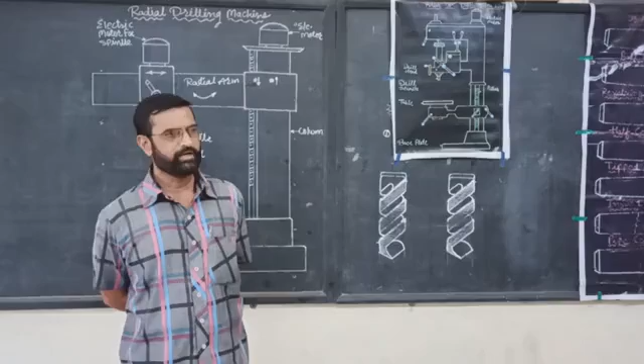In the previous video, we observed what is safety. Safety means work with confidence and with a cool mind. To avoid accidents is known as safety. There are two kinds of safety things, safety precautions we can call.

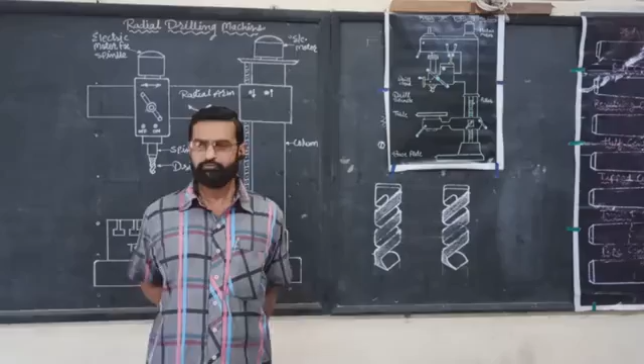Safety precautions for an individual means a person working in the workshop has to follow a few rules, such as do not wear loose clothes. If you wear loose clothes, those may get stuck in the bench vice, in a machine or in some handle, and it may cause an accident. Similarly, we have so many sliding and rotating parts in our workshop. So loose clothes may get trapped in those parts, which may cause an accident. To avoid that, one should not wear loose clothes.

Similarly, in the workshop, whenever we are working, we have to work with confidence and without laziness. We must be alert while working in the workshop. Do not see what the neighboring person is doing. Focus on your work and work with confidence.

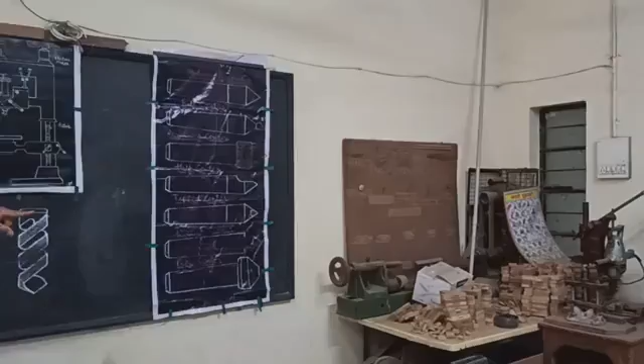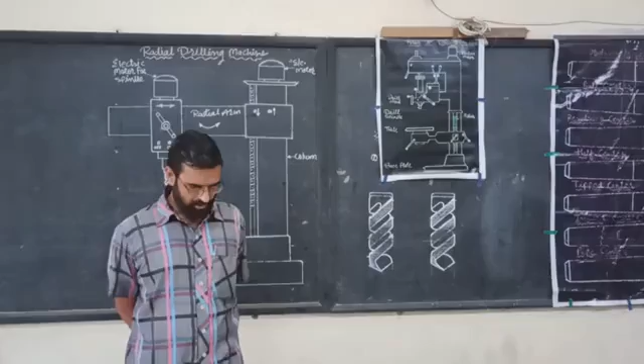Similarly, in the workshop, we have so many machines. We have a drilling machine. Similarly, we have a grinding machine, lathe machine, cutting machine. Till you get proper information about these machines, you should not touch them. Whenever proper information is given, then you are ready to use it. But without proper information, one should not use or touch machines.

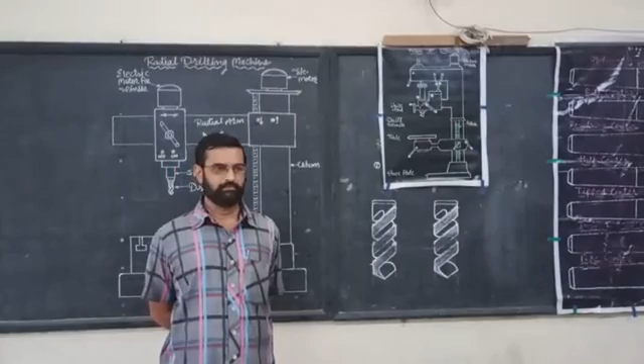In the workshop, we are handling many sharp tools regularly. Whenever a tool drops from our hand, its target is our leg. So to avoid injury, an individual should wear shoes in the workshop, by which there will be less injury for an individual.

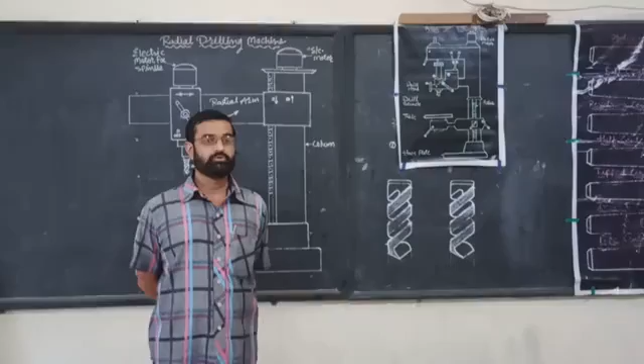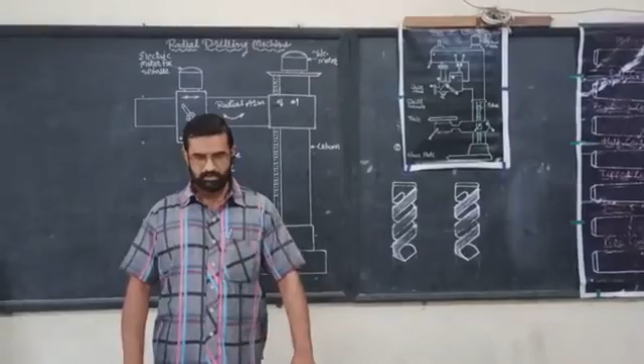Similarly, whenever working in the workshop, we all know our capacity. We should not cross our capacity. Work within the capacity. Do not go beyond the capacity. Now, an easy example I will show you. This is a table. It is heavy. A single person can't lift or move this table. That's why don't try to do these kinds of things. We all know our capacity. Better stay within the capacity, don't cross that capacity.

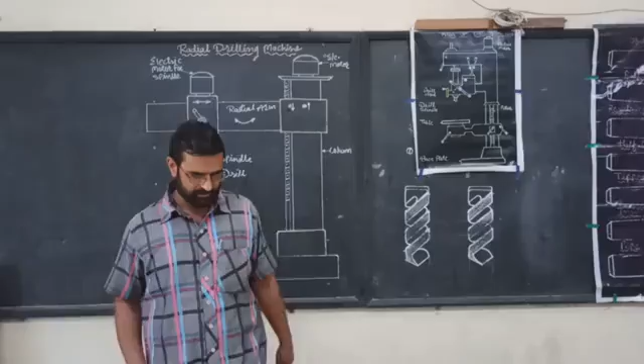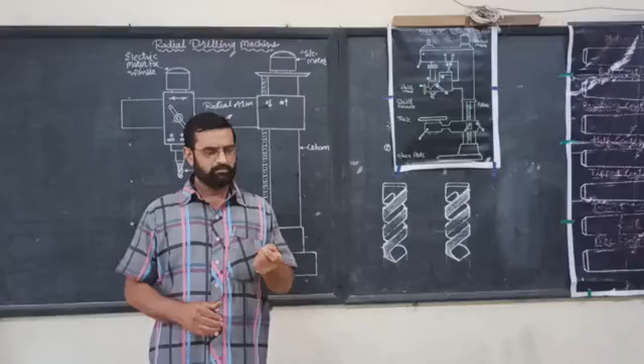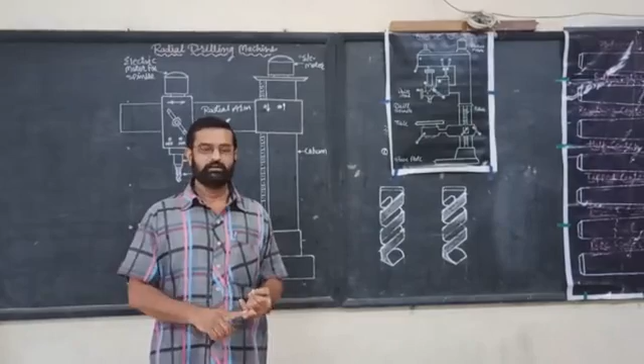Whenever we are working, whenever we want to prepare a few parts, at that time we need to use a grinding machine, welding machine. Similarly, to remove material, we need to do chipping. At that time, minute particles of metal will get removed. To avoid injury during these operations, we must use goggles. While welding, while grinding, as well as while chipping, one has to use goggles. Okay. Just now, we observed the safety precautions one has to follow.

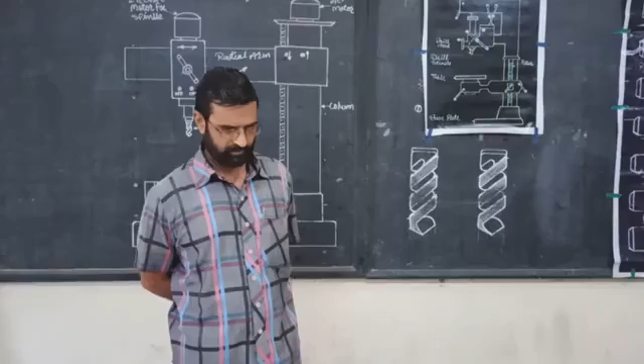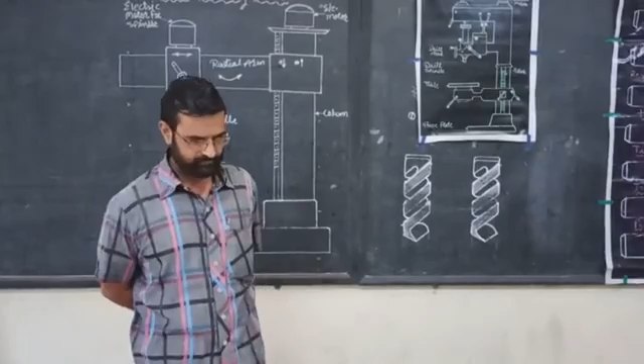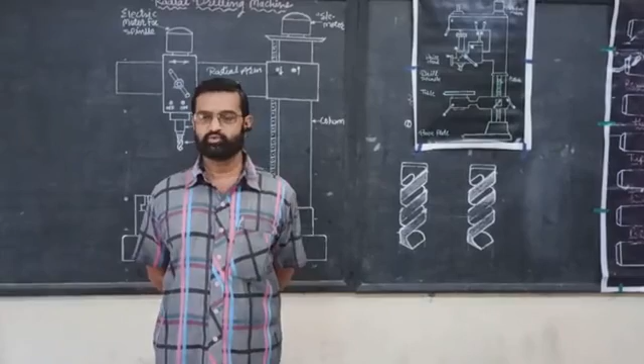Now, we will see what are the safety measures to be taken in the workshop. See, whenever we are working in the workshop, after completing our work, we should clean the workshop, we should clean the table, by which our workshop will always be clean and tidy. Similarly, in the workshop, we should not work in insufficient light and air. Insufficient light causes accidents. Insufficient air causes suffocation. So in our workshop, proper ventilation should be there. Work in proper light as well as air.

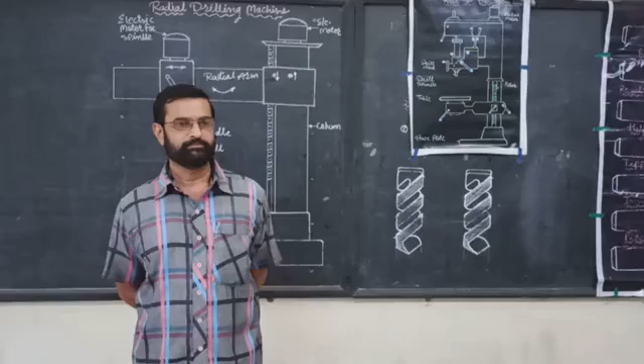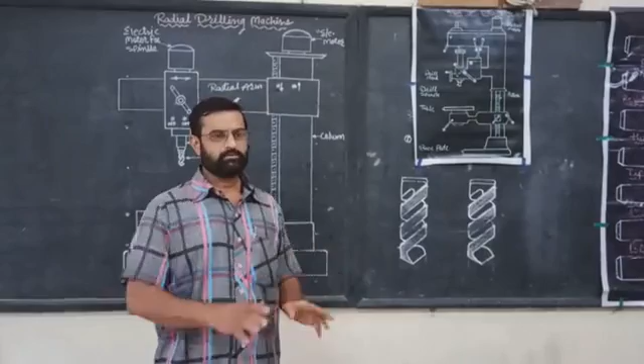Similarly, sometimes whenever we are working in the workshop, oily substances drop on the floor and a person may slip on those surfaces. So as soon as you observe oily substances dropped on the floor, immediately take cotton waste and wipe it out, by which we can avoid further accidents.

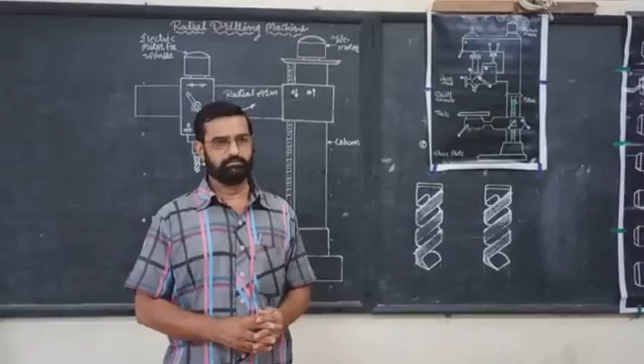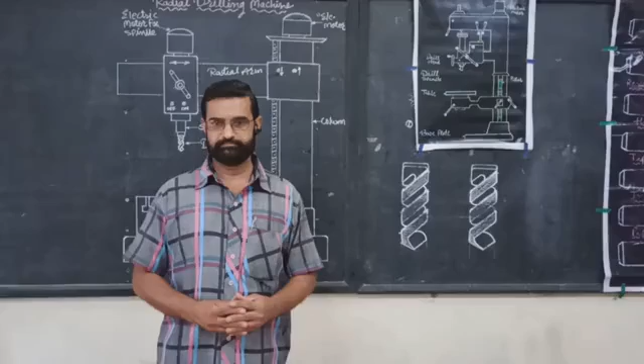After completing our work, we need to keep all the tools properly in the shop, in the cupboard. Take care that all the tools are kept separately. Different kinds of tools should not be kept together. Because of that, the sharpness or the accuracy of those tools may get hampered. So avoid keeping different kinds of tools together. Keep them separately.

In the workshop, we are using machines. They have rotating parts. Always cover the rotating parts of a machine whenever the machine is not in use. Do not keep rotating parts exposed. So always keep the rotating parts of the machine covered.

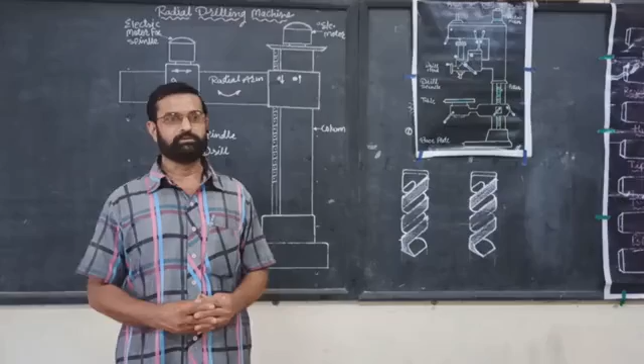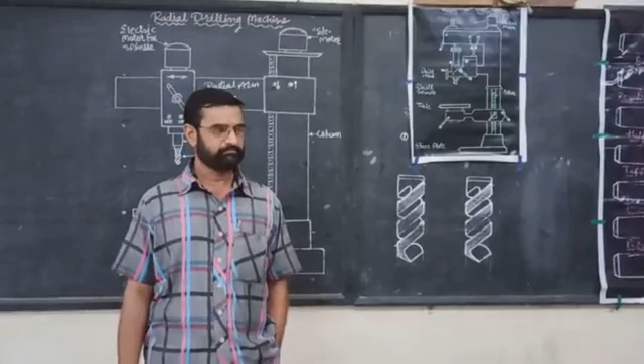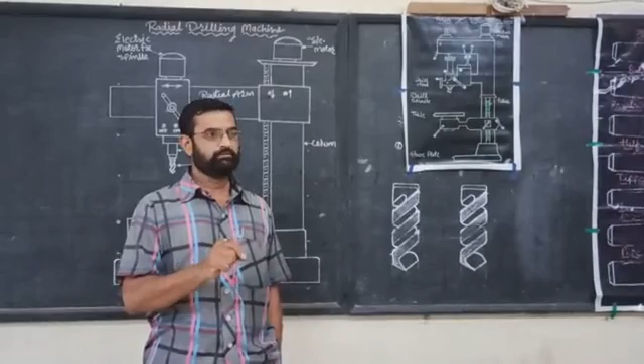In the workshop, if an accident causes a fire, we need to suppress that fire. So we must have a fire extinguisher in the workshop. And do not just keep that fire extinguisher hanging on the wall. Check that fire extinguisher periodically, whether it is working or not. What is the expiry of that fire extinguisher? Better check it, so that whenever there is a need, it will work properly.

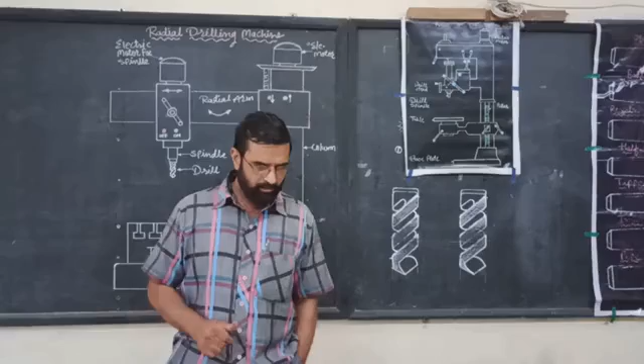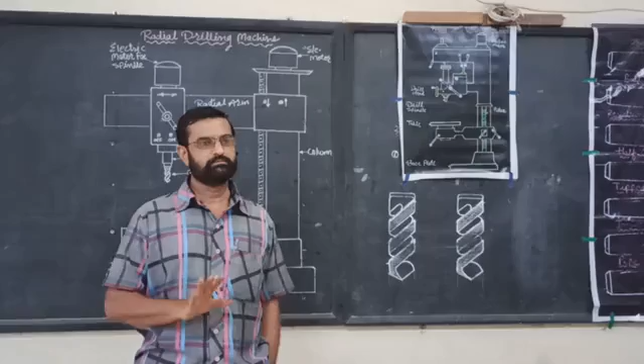And the most important thing, after completing work, switch off the machine and then leave the workshop. Don't keep buttons in the on condition. After completing work, switch off the buttons and be safe in the workshop. Now we'll go to the second lesson. The second lesson is hand tools used in the fitting workshop.

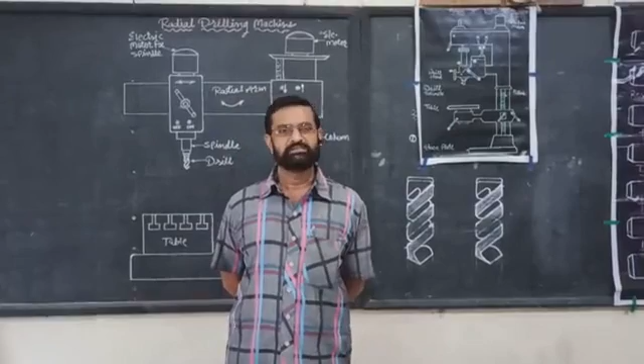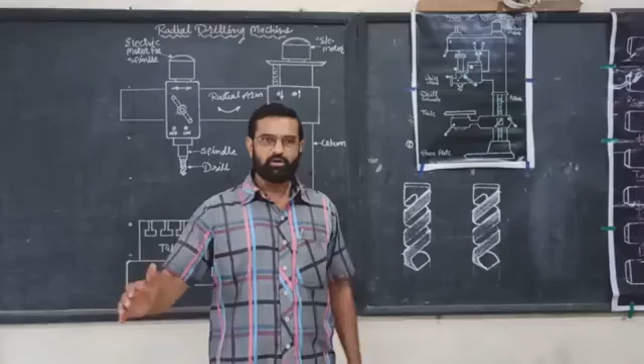We frequently use a few hand tools in the workshop, such as hammer, punch, plier, spanner, screwdriver, pipe spanner. These are the tools and instruments we frequently use in the workshop. Now let us study all these one by one. The first one we'll see is the hammer. You all are familiar with this. This is a hammer.

What are the parts of a hammer? This is the pein. This pein is different for different kinds of hammer. Now observe this pein. It is circular in shape, so it is called a ball pein hammer. This is a ball pein hammer. Here, where the handle is inserted, it is called the eye. This portion is the cheek. This is the face.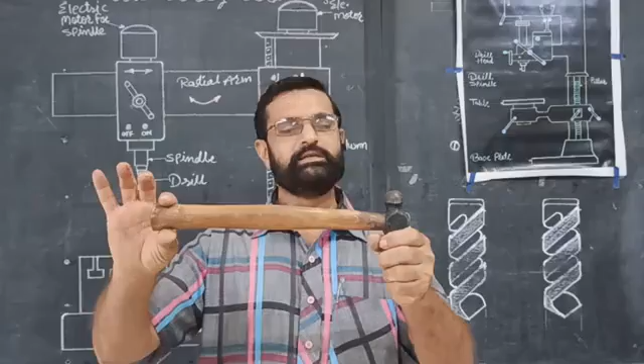The ball pein hammer is generally used to expand the sheet, to expand the metal. Similarly, it is also used for driving nails as well as for beating, getting something straight, or bending the metal. For this the hammer is used. According to weight, the length of handle is fixed for the hammer. This is called a ball pein hammer because its pein is round in shape.

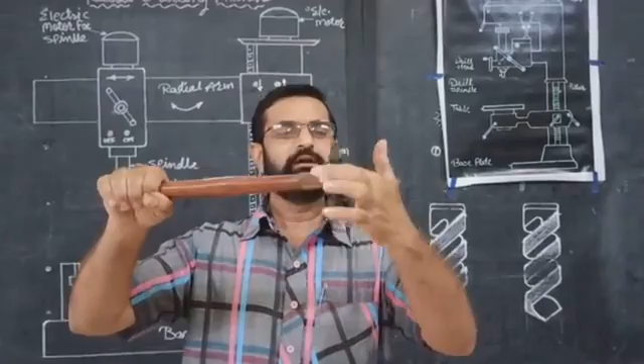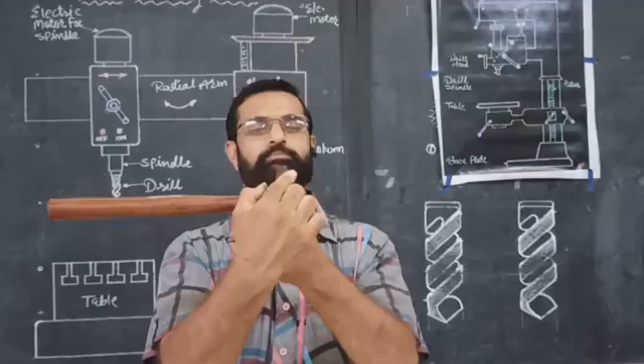Another hammer we are going to use is the cross pein hammer. The remaining construction is the same; only if you observe the pein, the upper part of the hammer, it is tapered, conical in shape. It is used to beat in V-shaped channels. This shape you can observe is a V shape. So to beat in corners, to get a V shape, this cross pein hammer is used.

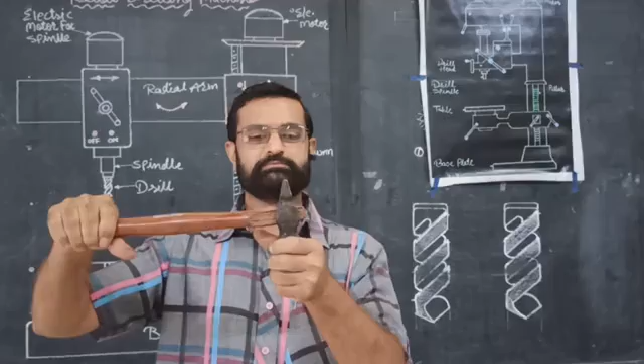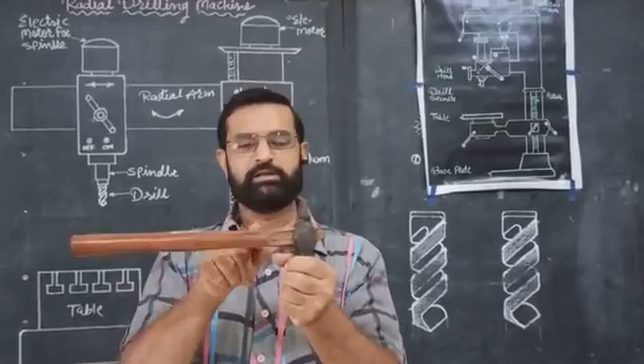The rest of the parts are the same. One more kind of hammer we have is the straight pein hammer. The pein of the cross pein is perpendicular to the handle. Instead, if this pein is turned and kept parallel to the handle, it is a straight pein hammer. The straight pein hammer is also used for forming V-shaped grooves or striking blows in the corner. In this way, hammers are used.

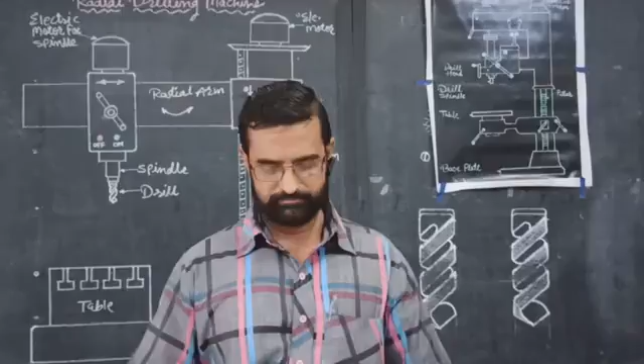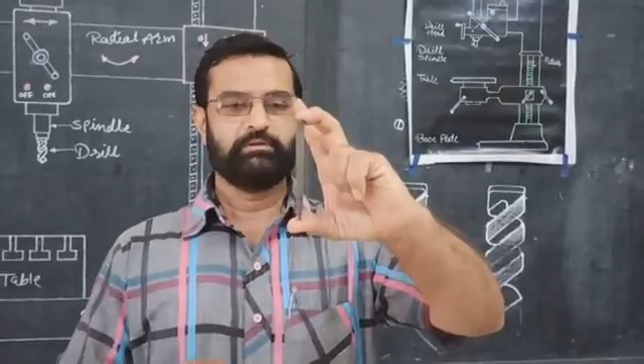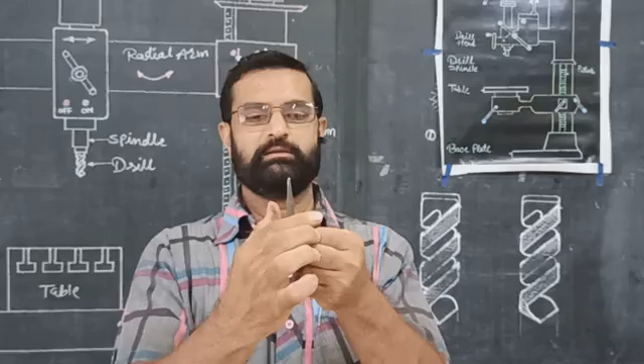The next thing is the punch. This is a punch. It is used to make marking permanent. There are two kinds of punch: one is the dot punch and another is the center punch. What is the difference in these punches? Only the point angle is different. For the center punch, the angle is 90 degrees, and for the dot punch, it is 60 degrees. The rest of the construction of the punch is the same.

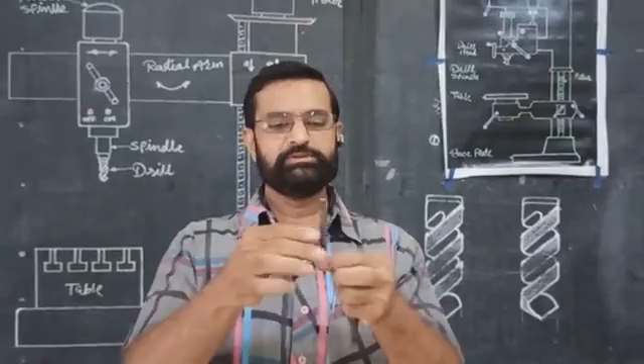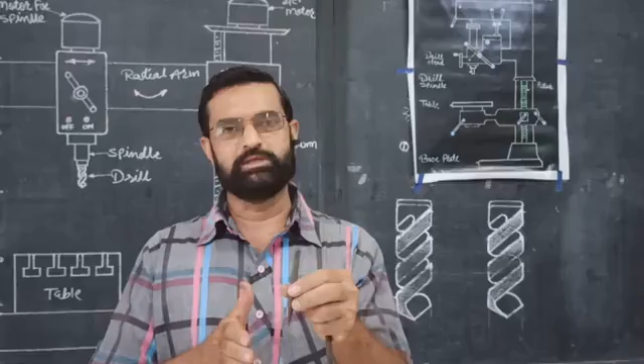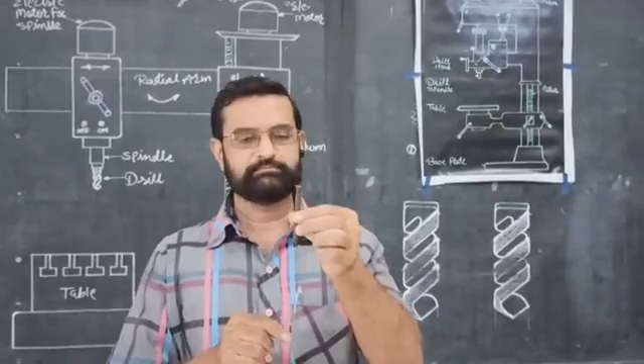The dot punch is used for making marking permanent. By striking blows with a hammer, we put dots on the metal, by which whatever marking we did on the job will remain permanent. That is the use of the dot punch. Whereas with the center punch, whenever we are drilling, we need to put a punch on the drill center. To put a punch on the drill center, this center punch is used.

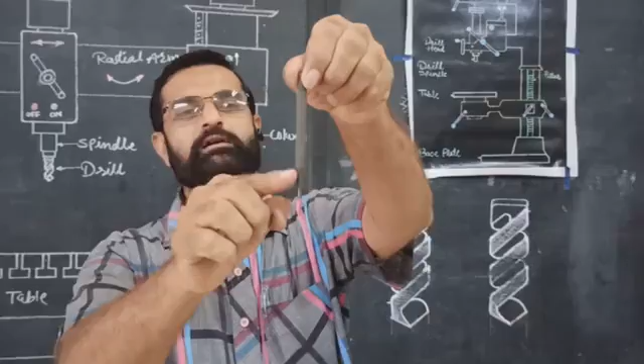Both punches have the middle part knurled. This middle part, if you see, is knurled, meaning made rough. It is the handling part. The punch should not slip from your hand, so this middle handling part is made rough. It is called knurling.

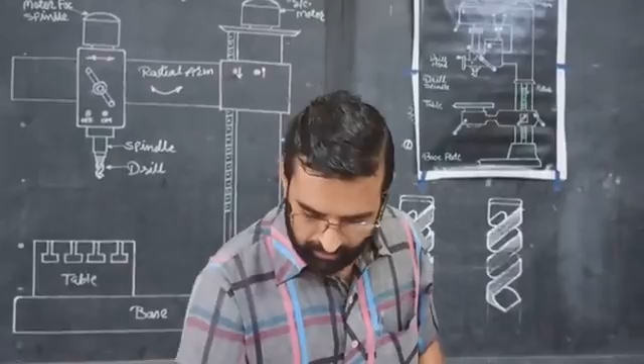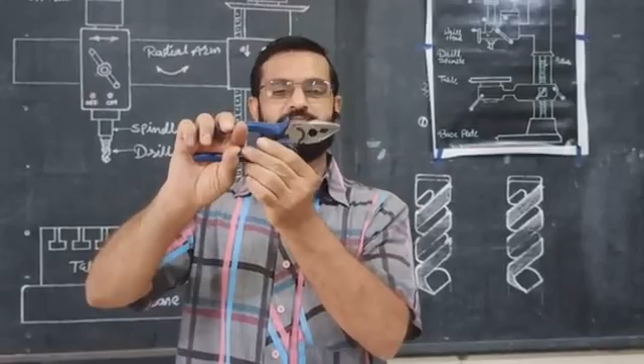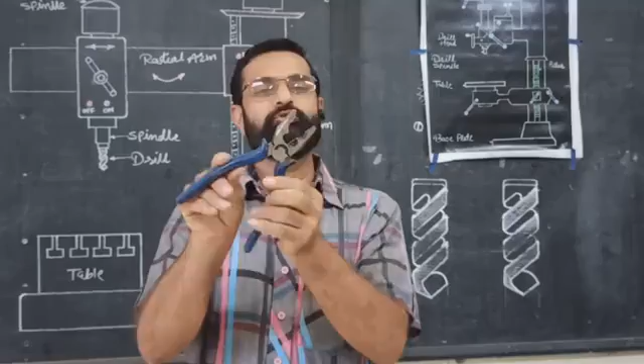The next thing we have, which generally everybody has in their house, is the plier. This is called a plier. It has a long handle and sharp jaws. It is a combination plier. This front portion, if you observe, is made flat. For general purpose gripping, this flat portion is used. If you observe that flat portion, you will see notches made rough, by which it will grip properly.

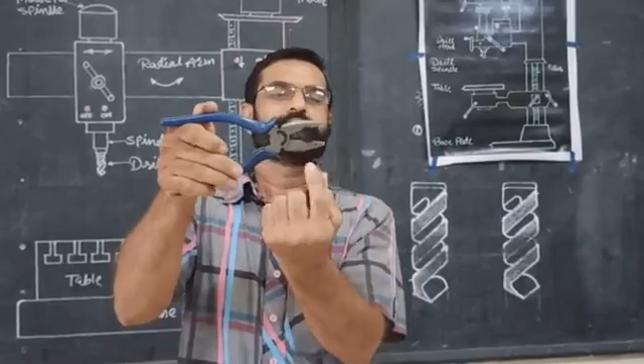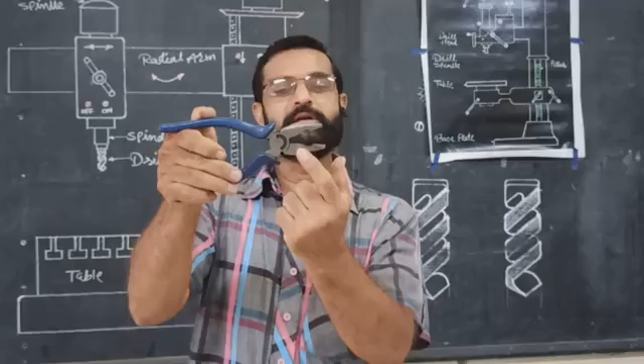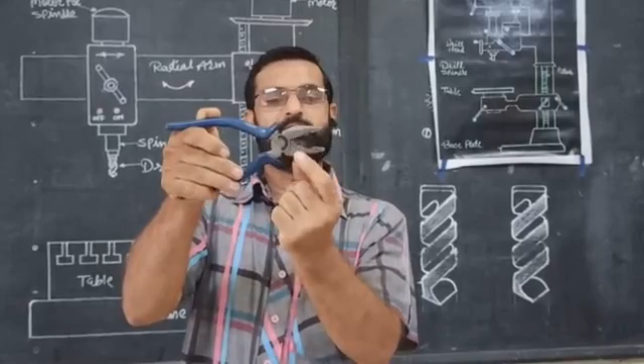Behind that, we have a circular grip. You observe this. It also has notches. This circular jaw is used to grip circular jobs. Circular jobs will be gripped properly in this. For that purpose it is used. After that, you can see this part. It is made flat, but it is sharp. It is a cutter. Metallic wires are cut with this, so it is a cutter.

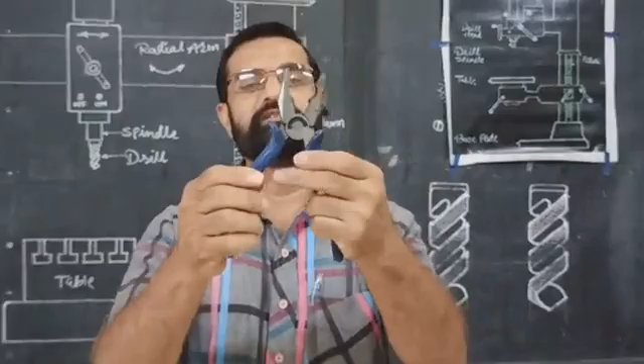Similarly, here we also have another cutter. Here, if you see, one notch is there, and wires are cut with that. Whenever we want to remove just the insulation from electricity wires, this cutter will be used. Only the insulation will be removed and the inner metallic part remains as it is. So it is a wire cutter.

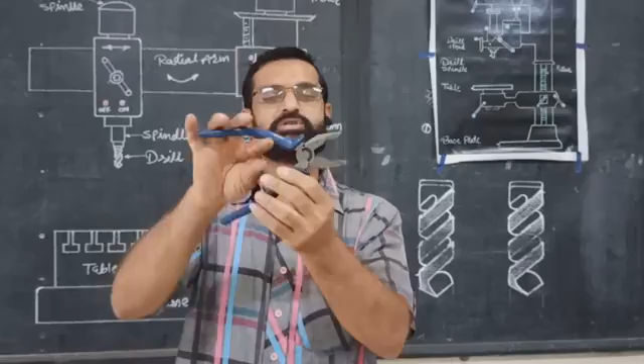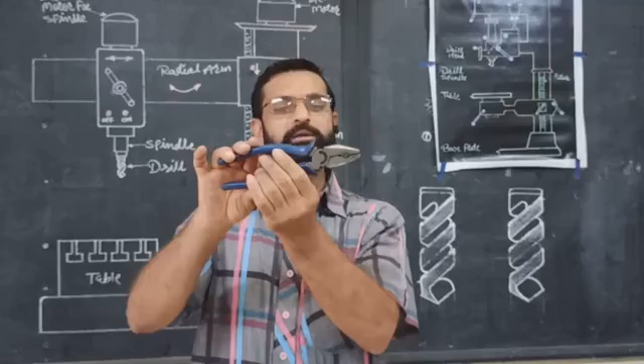In this way, these are the few parts of the plier: flat jaw, curved jaw, wire cutter, and this electric wire insulation cutter. Similarly, this handle. These are the important parts of the plier. This is the combination plier. For all purposes, to grip, to cut, this plier is used.